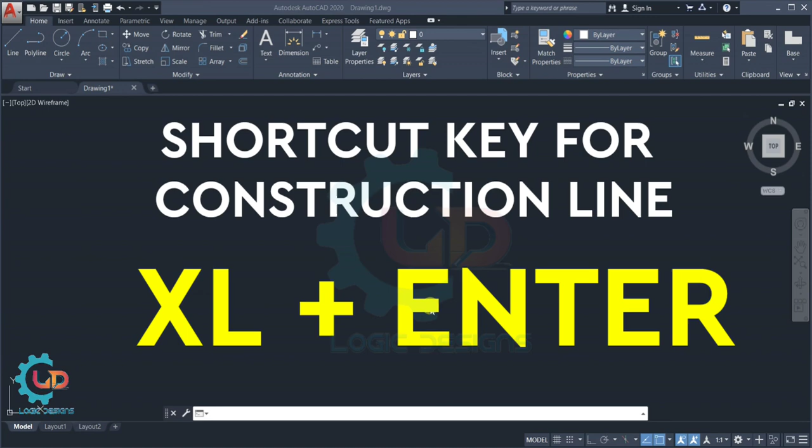You can find the construction line command from the draw menu of the home tab, or you can use a shortcut key for construction line. Here we can see in the draw tool palette the construction line command is displayed.

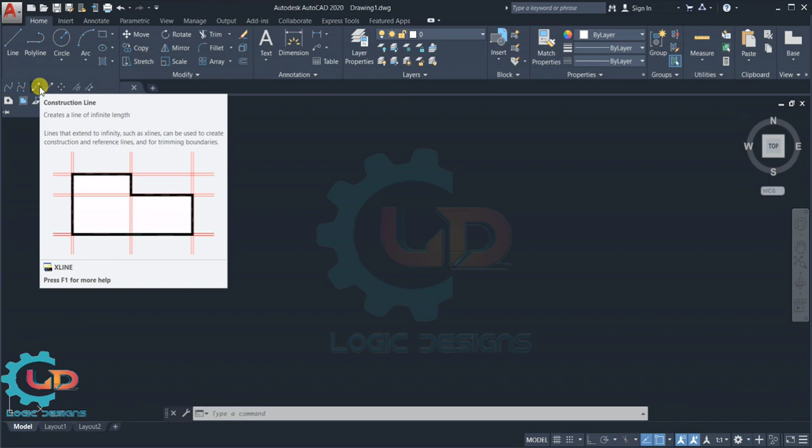In the construction line we can create a line of infinite length. That means the lines that extend to infinity, such as X lines, can be used to create construction and reference lines and for trimming boundaries. Class, before that, we need to create and draw an entity for better understanding the construction line.

You can put XL from the keyboard for the shortcut key of construction line. You can see here X line, that means construction line option is displayed. Now in the command bar you will see the 5 types of the construction line present: horizontal, vertical, angular, bisect and offset. Now class, we will see first the horizontal command of construction line.

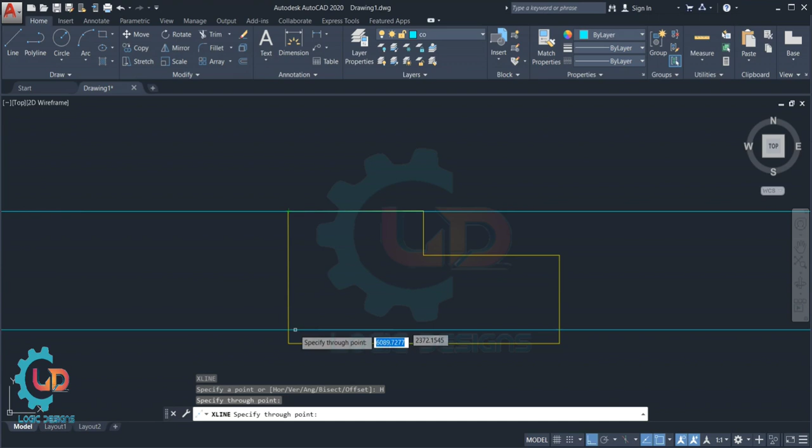In this command we make a horizontal line in our drawing. Now first select horizontal option from command bar. For making a horizontal line you can click at a specific point on your desired drawing entity in horizontal direction, and the horizontal line will come on your drawing as a reference line.

You can see here two horizontal lines are created. I am creating here a simple rectangle by using these two horizontal construction lines, that means horizontal reference lines. Okay, you can see here we can easily create a rectangle by using this infinite length reference line.

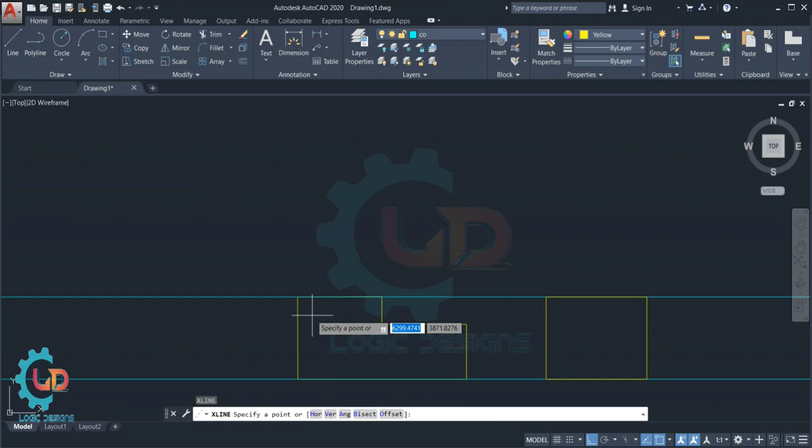Now our next step is vertical construction line. In vertical construction line, by using vertical option you can create vertical reference line. Class, if you want a vertical construction line, then click in vertical direction at a specific point of your working entity or drawing entity.

Now I am clicking at the corner points. Now you can see here two vertical reference lines are created. Now I am giving color. Okay, now you can better understand the vertical construction line.

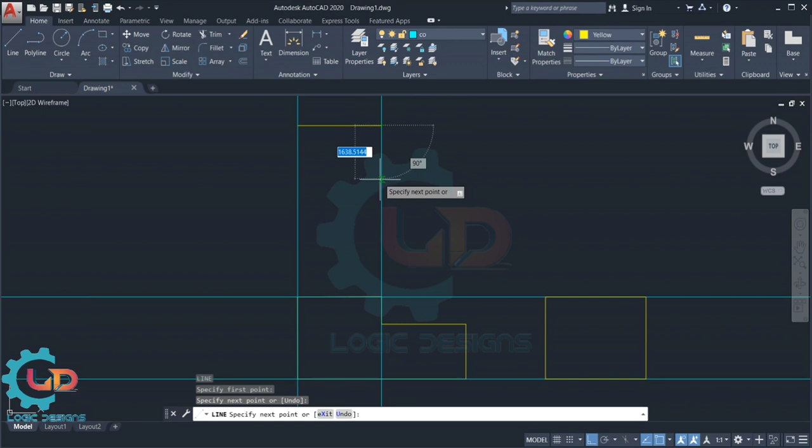Now I am creating a simple rectangle by using line command on these two vertical reference lines. Okay, now first I am giving a color for better understanding the rectangle, and here we go. The rectangle is created by using these two vertical reference lines, that means vertical construction line.

Okay, now next is angular construction line. If you want to make a construction line at a particular angle or inclined line, then select angular option from command bar. Okay, now I am selecting here inclined or angular option. Now it will ask you the particular angle. Now here I am giving 45 degree angle.

Okay, now press enter. Now select a particular point. I am selecting these corner points. Here you can see the infinite length angular reference lines, that means inclined construction lines, are created. Okay, see here. You can easily delete these lines by selecting these lines. Okay, first here I am selecting all vertical, horizontal and inclined lines one by one.

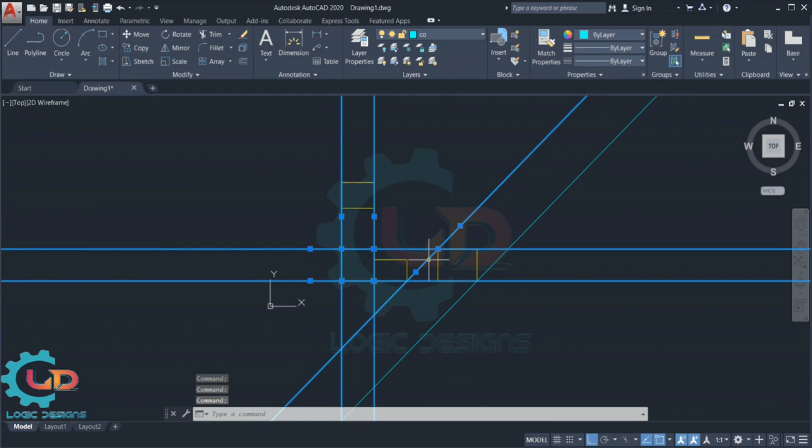Okay, now next press delete key from keyboard. Now you can see here all vertical, horizontal or inclined lines are deleted.

Class, next is bisecting construction line. You can use this construction line as a bisected reference line. For bisecting reference line, select bisect option from command bar. Now it will ask you a corner point of your drawing entity.

Now I am selecting here. Now next specify the second point for its reference line. Now you can see here bisecting reference line or bisecting construction line is now created. Okay, you can use this line as a reference for your particular drawing object. For exit the command, press enter or select a corner point.

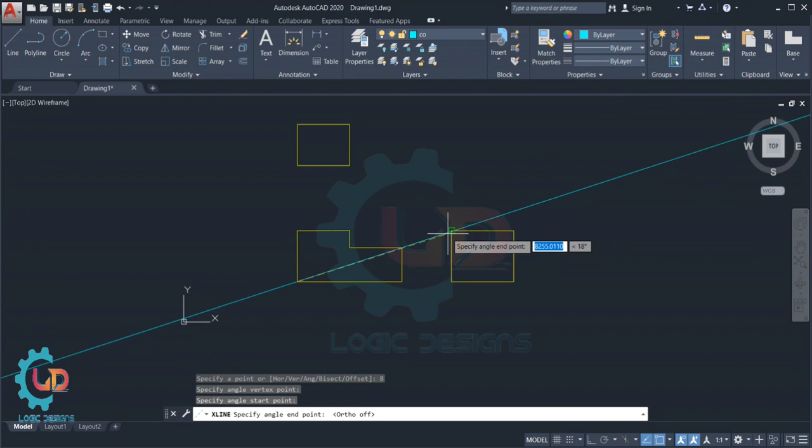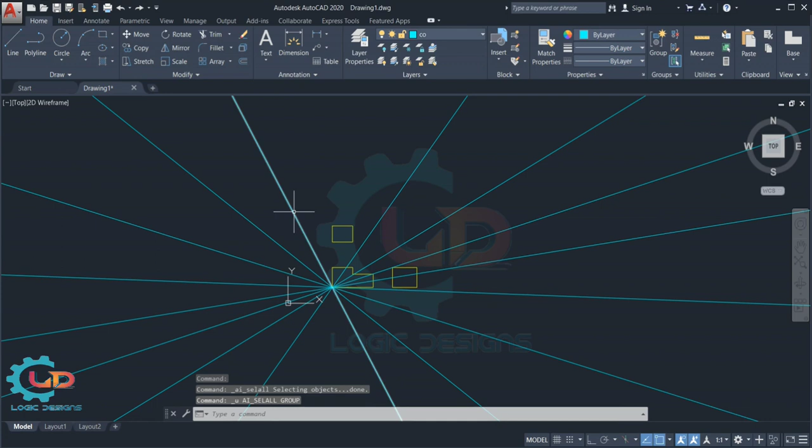Now you can see here I am creating lots of bisecting lines by using specific angle or a point. Now I am deleting these lines by selecting one by one. Okay, first you need to select all lines. Now press delete key from your keyboard.

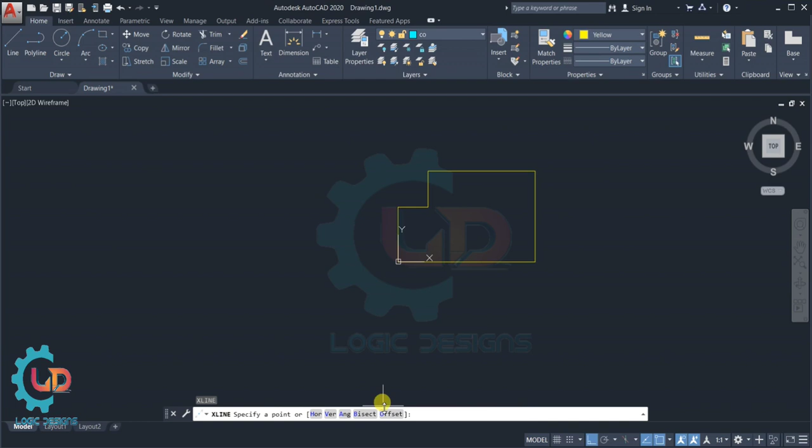Last command from the construction line is offset construction line. Now put from your keyboard XL, then press enter and then select offset option from the command bar. Okay, it will ask you a specific line through which you want to offset a construction line. Now select a particular line or a drawing entity.

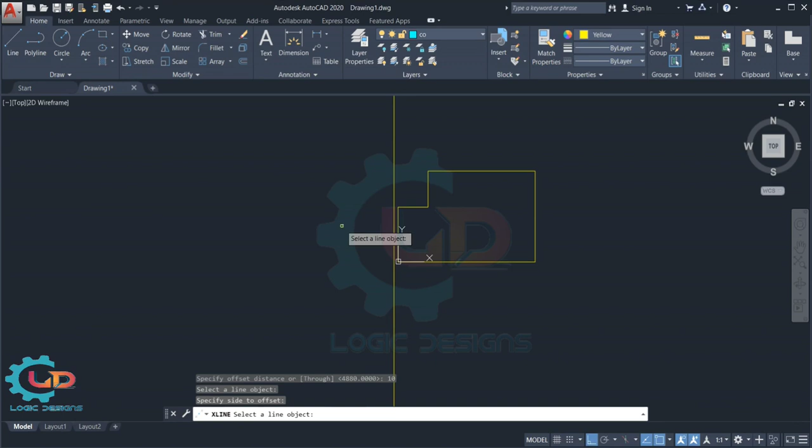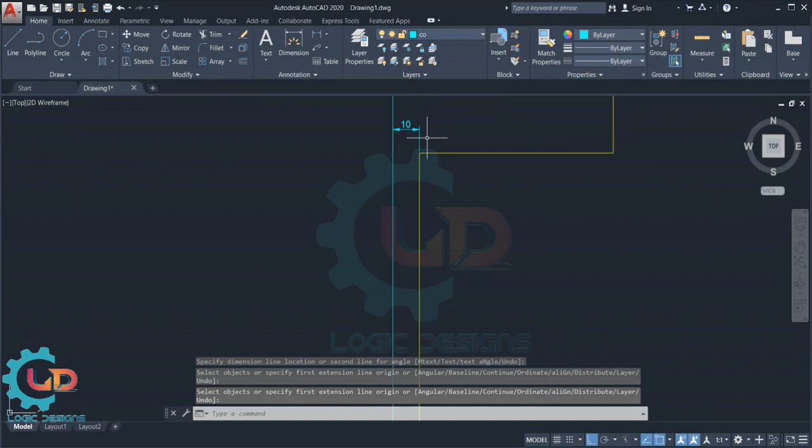Okay, I am giving 10 mm distance. Now you can see here the offset line is now created. Okay, I am giving this a color for better understanding the reference line. Okay, now I will check the distance between these two lines. Okay, you can see here 10 mm distance. Okay, that means offset is created.

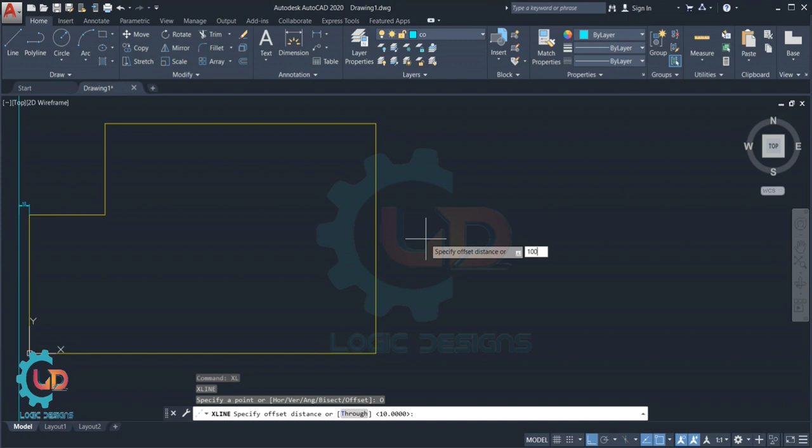Now again I am creating a new construction line or offset line. Okay, now select offset. Now give a specific distance. I am giving 100 distance. Okay, now press enter. Now select a particular line. Now select right hand side or left hand side. I am selecting right hand side. Now you can see here the offset construction line is now created.

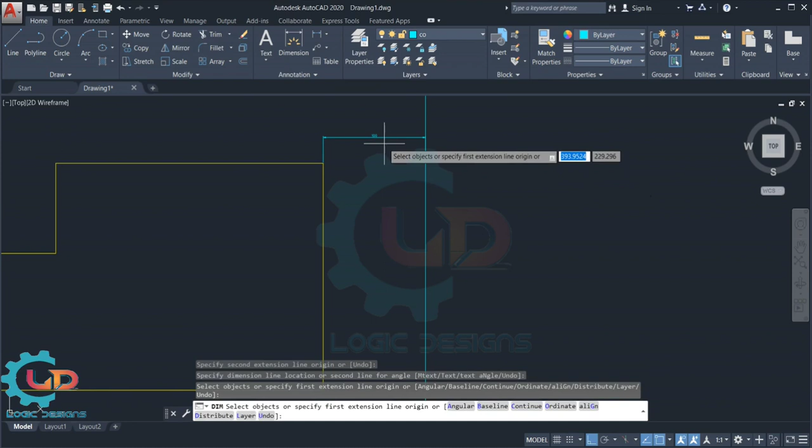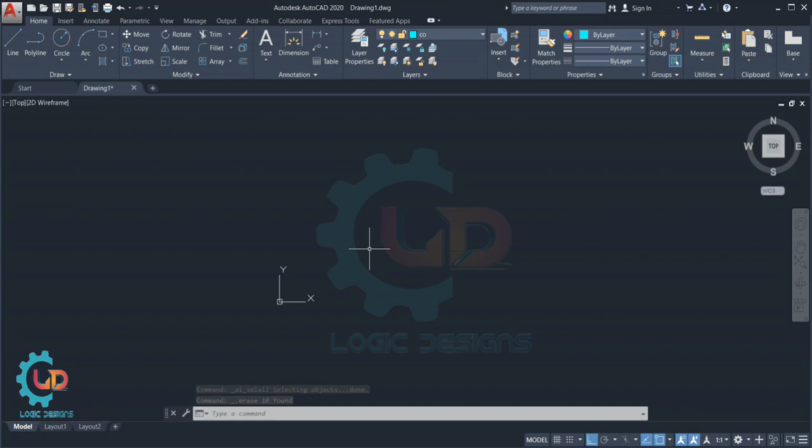Now I am checking the distance. Okay, zoom it. Now you can see here 100 mm distance. Okay, that means the offset construction line is now created. Here I want to share some small tips regarding the horizontal, vertical, angular, bisect or offset construction line.

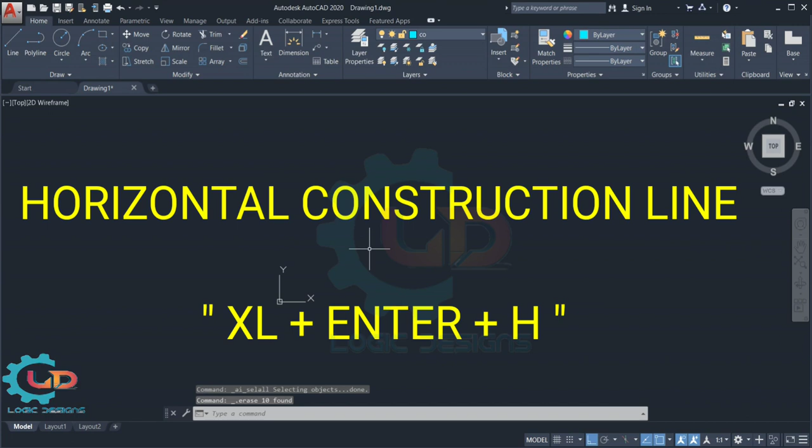For horizontal construction line, you can put XL from your keyboard, then press enter, then again press capital H from your keyboard. After all procedure is done, the horizontal construction line is created on your drawing entity. Next is vertical construction line. For that, put capital XL, then press enter and put capital V in command bar, then press enter. After all procedure is done, you will see the vertical construction line is created.

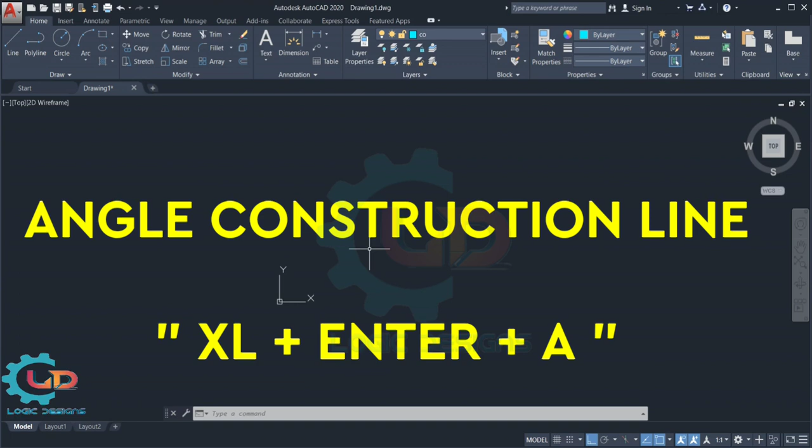Next is angular construction line. For that, put XL, then press enter, then put capital A from your keyboard. You will see the angular construction line is created in your drawing entity. Next is bisecting construction line. For that, you can put XL, then press enter and then put capital B in command bar. After all procedure is done, bisecting construction line is created in your drawing entity.

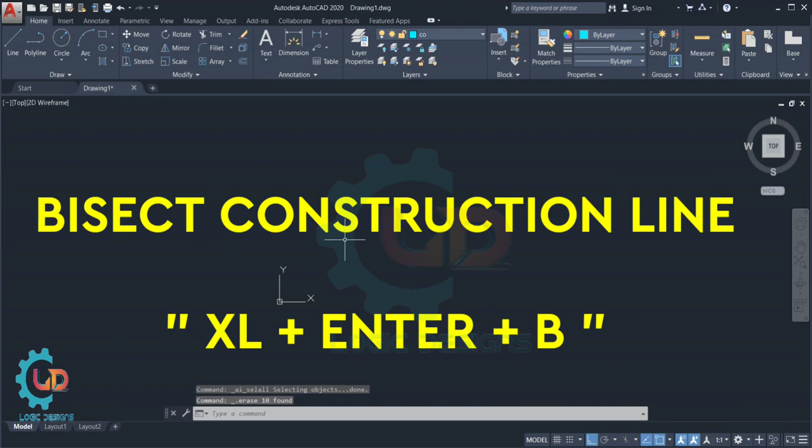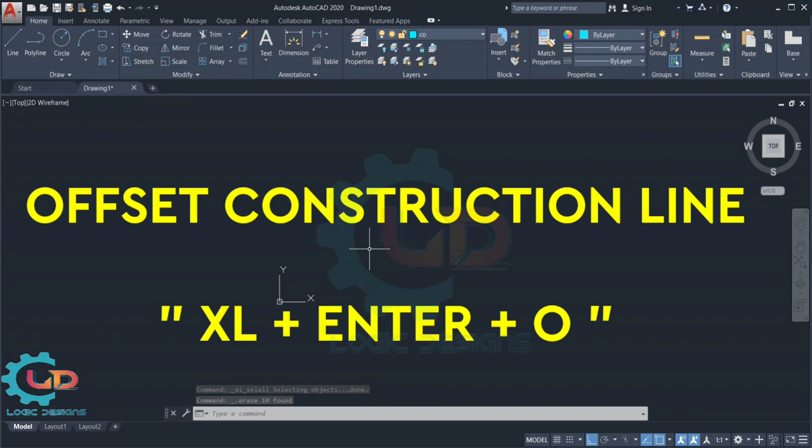Next, offset construction line. For offset construction line, put capital XL, then press enter, then press capital O from your computer keyboard. After all procedure is done, you will see in your drawing entity the offset construction line is created.

That's it, class. I hope now you can understand the construction line in AutoCAD, what are the types of the construction line, what are the shortcut keys for construction line, or how you can handle the construction line parameter for making reference lines in your drawing from different directions.